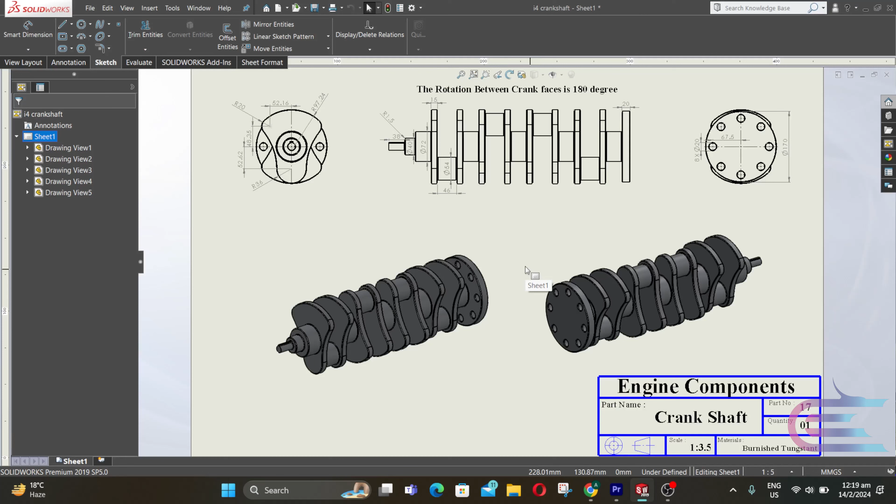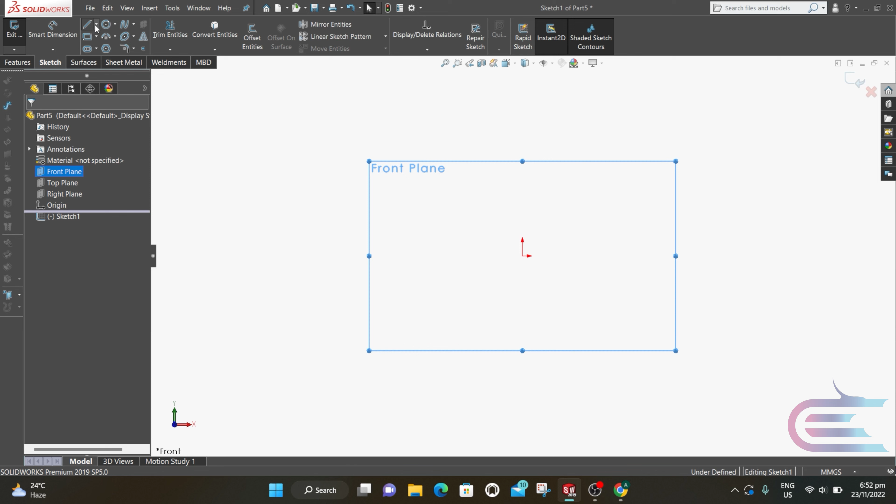In today's tutorial, we are going to design an I4 crankshaft. So let's start. From File, select New, then Part, then click OK. Right click over the front plane and select Normal. Right click again and select center line and draw a center line vertically.

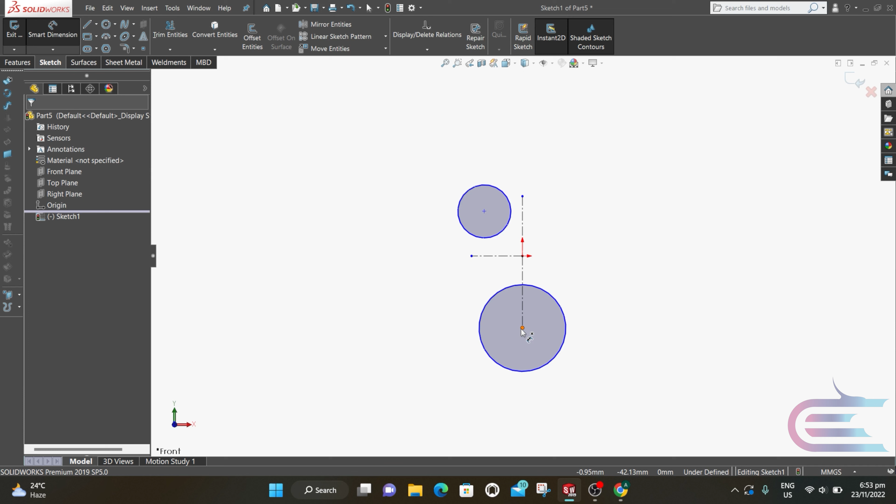Draw a horizontal line from the origin point. Select Circle and draw a circle at the bottom point. Draw another circle at the mid of these points. Select Smart Dimension, and this distance from the origin is 44 millimeter, and the diameter is 72 millimeter.

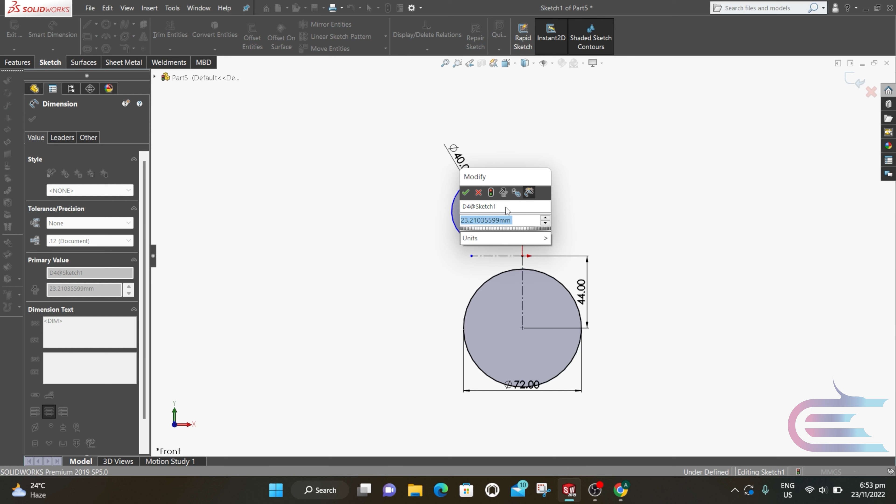This diameter is 40 millimeter, and the distance from the vertical line is 52.155 millimeter. Horizontal distance from center is 56.967 millimeter.

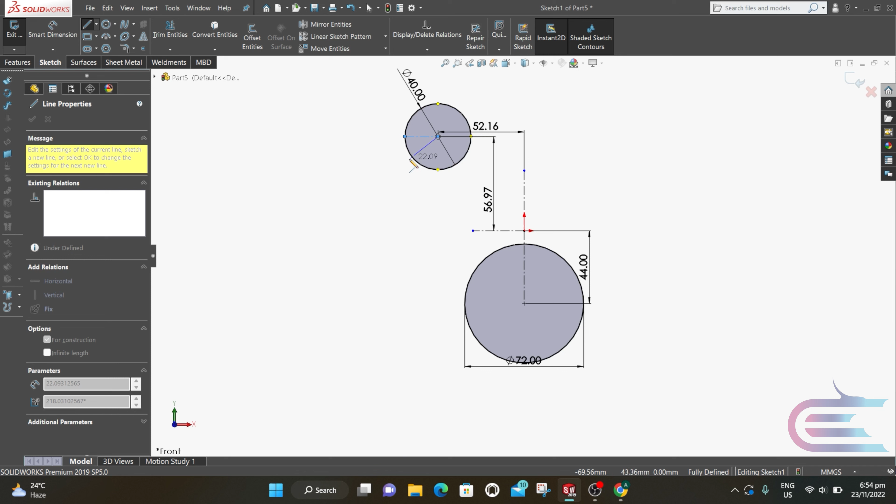Select center line and connect the outer edge of the circle to the center and draw an inclined line to the first one. Now select Smart Dimension. The angle between these two lines is 37.3 degrees.

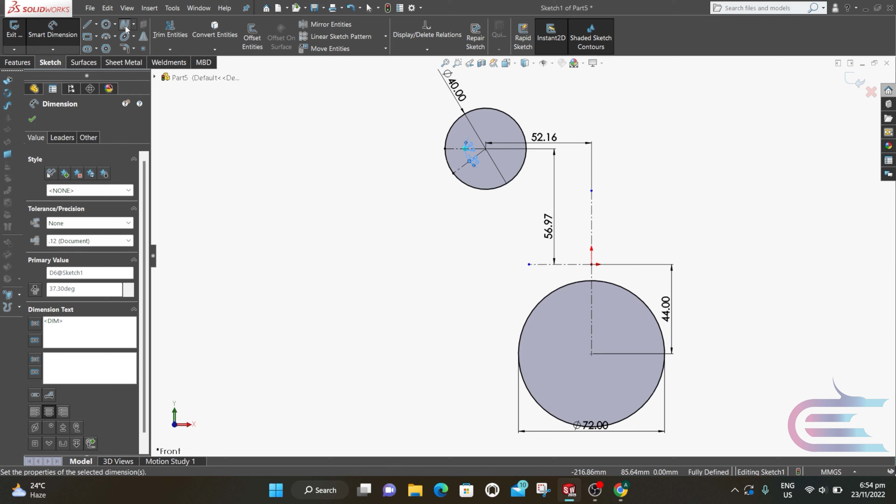Now select Spline, and from the horizontal outer edge to the circle and one point to the middle, and then another point to the outer edge of the inclined line. The distance from the midpoint of the spline to the horizontal line is 2.714 millimeter. And this point to the vertical line distance is 42.564 millimeter.

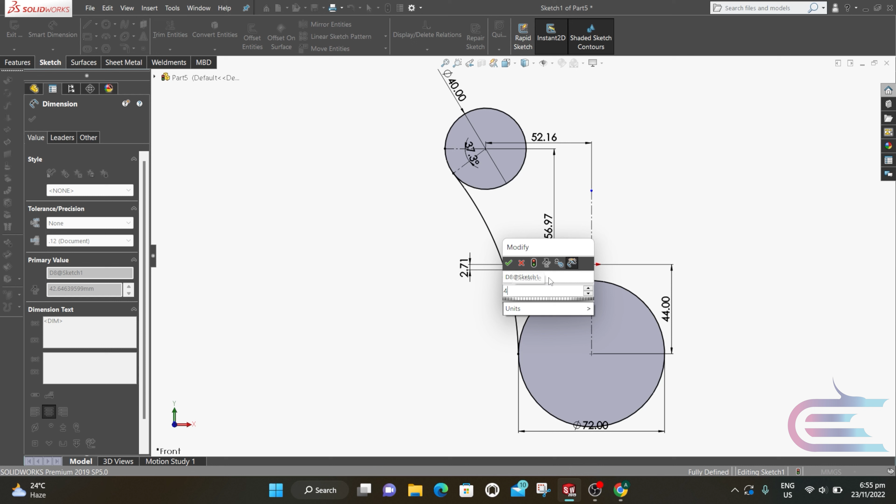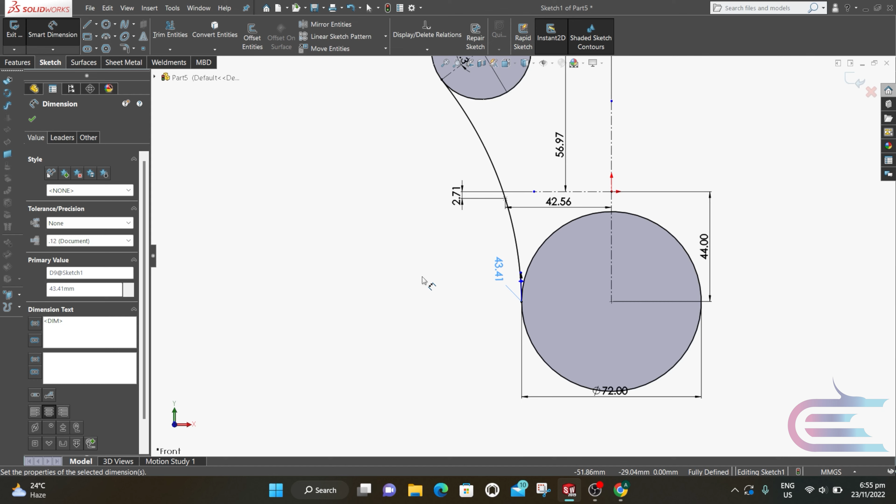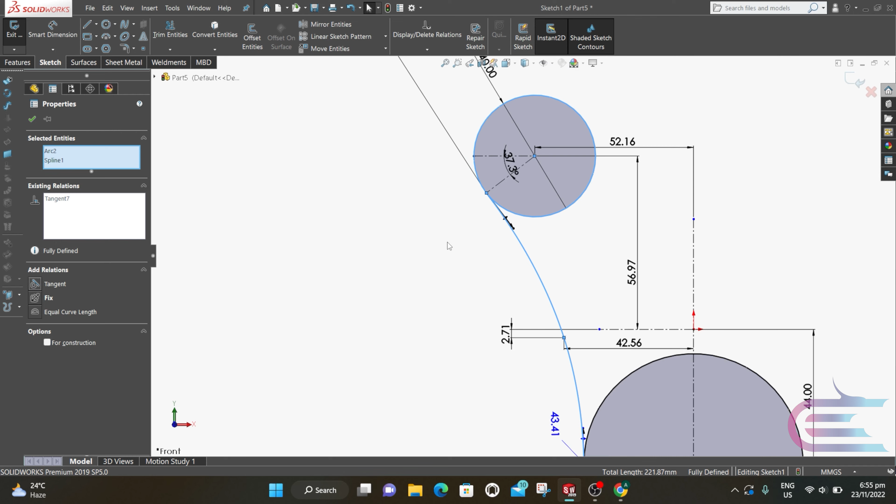Now click on the point handle, and the distance parameter is 43.41 millimeter. Similarly, click on the point handle of this side of spline, and distance parameter is 55.3 millimeter. Now control and select the spline and the circle and click on tangent. Then press enter.

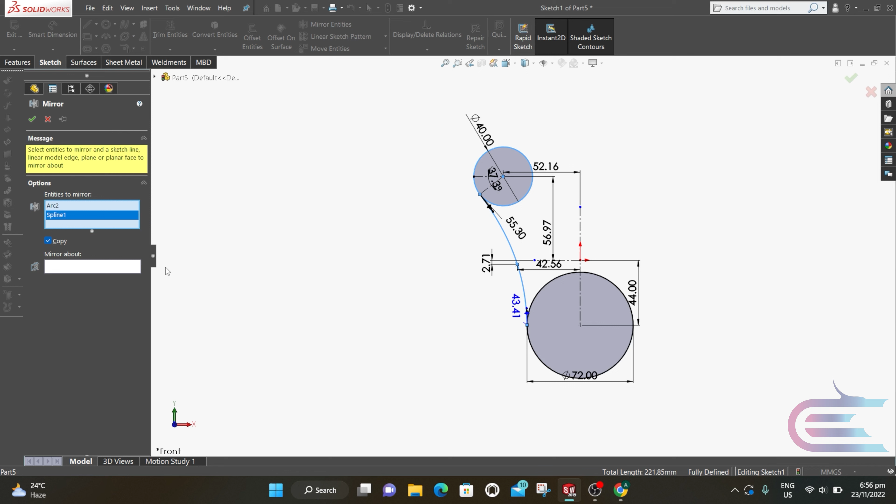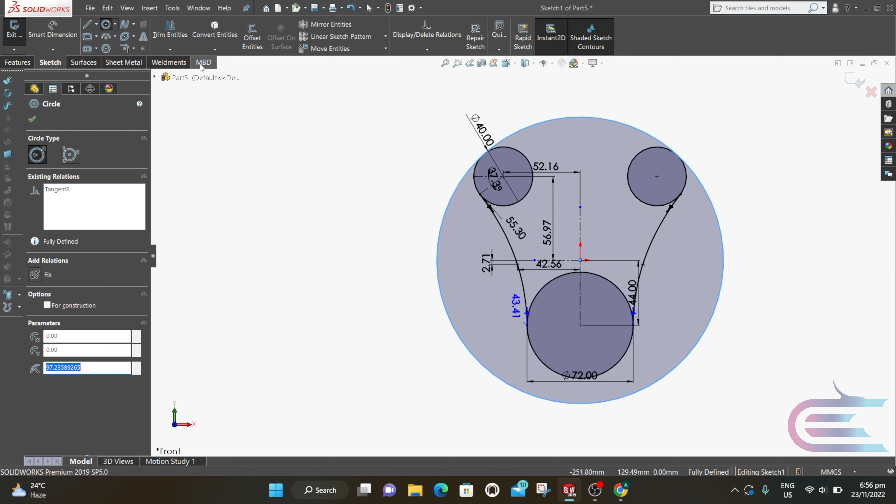Click on mirror and select the circle and the spline. Then mirror about the center line. Then click OK. Now click on circle and draw a circle till the outer edge of the upper circle. Now select trim and trim the extra portions. Then click OK.

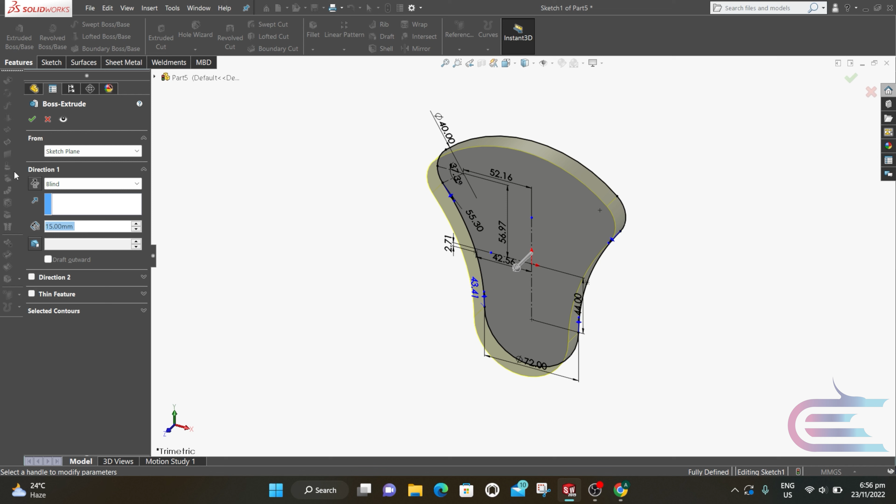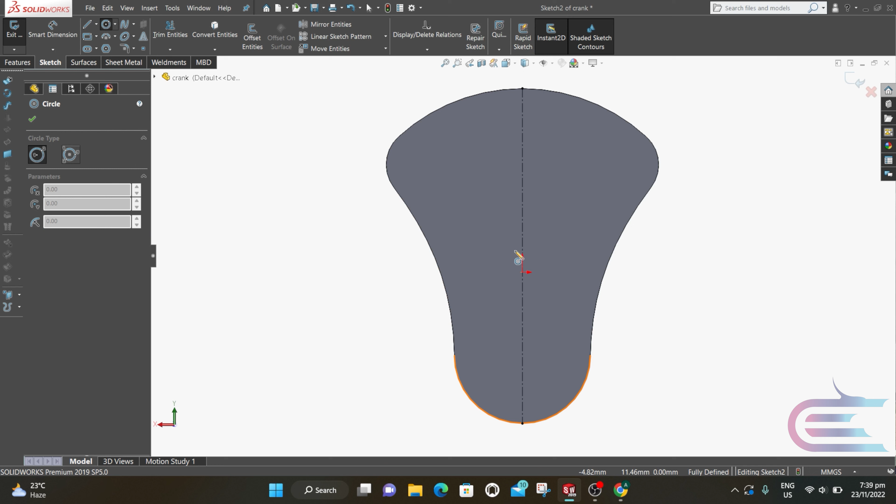From features, select extrude. Extrude 15 millimeter. Then click OK. Go to the opposite side. Right click over this plane and select sketch. Select normal to. Select center line and draw a center line from upper point to the bottom point. Then press escape. Select circle and draw a circle at the midpoint of the center line.

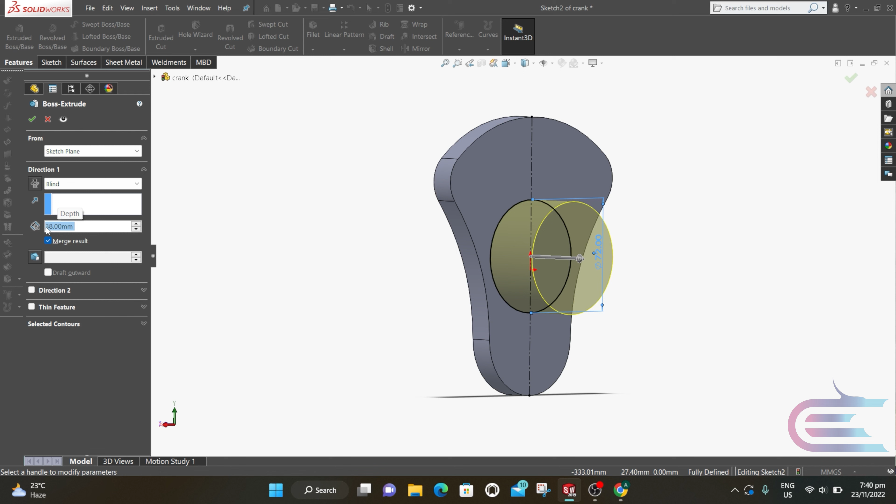The diameter of the circle is 72 millimeter. From features, select extrude and extrude 38 millimeter and click on merge result. Then click OK. Now go to the opposite side. Right click over this surface and select sketch. Select normal to.

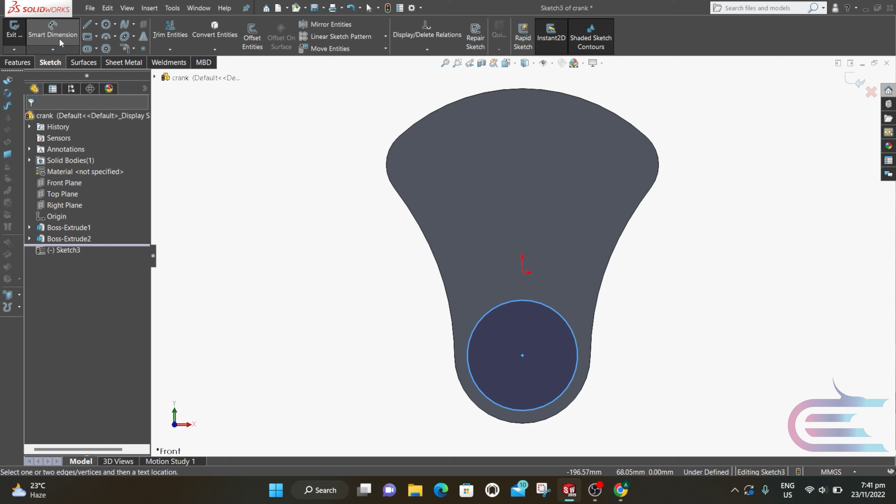Select circle and put the cursor over the outer edge. Then the center will be shown, and from center draw a circle. The diameter is 54 millimeter. Select extrude and extrude 46 millimeter. Click on merge result and click OK.

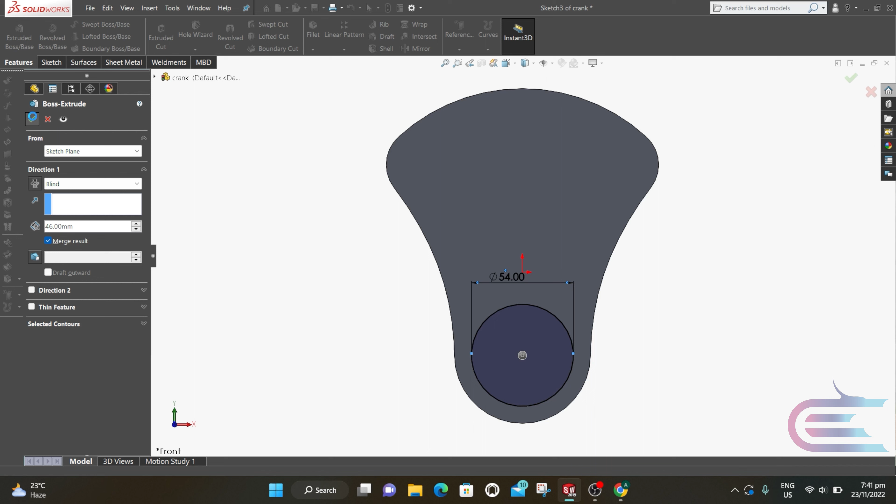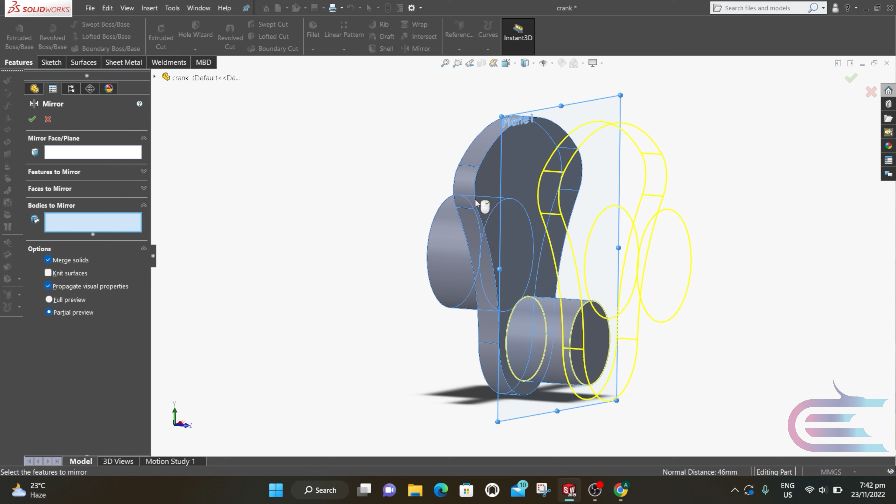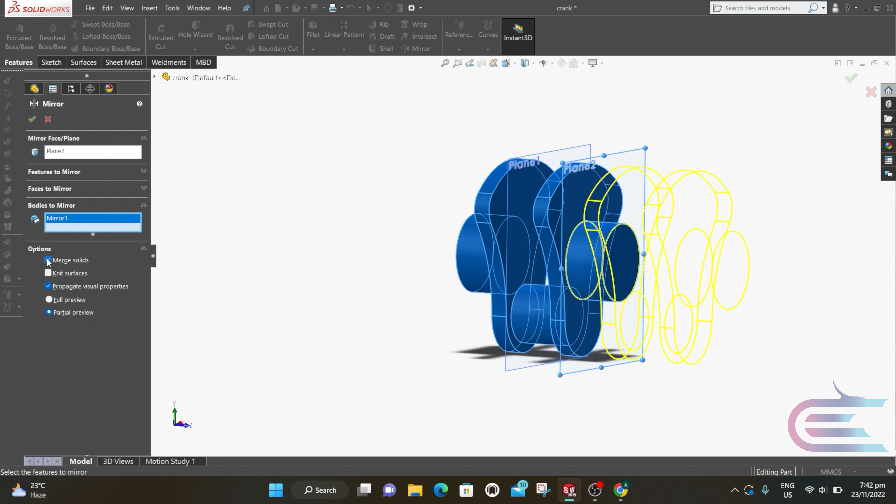From reference, select plane and click over this surface and this surface. So a new plane will be created at the middle of this, and then click OK. Select mirror and mirror about this plane. Select the body, then click OK. From reference, select plane again and select this surface and this surface. So a new plane will be created. Then click OK. Select mirror and the plane is selected. Select this body, then click OK.

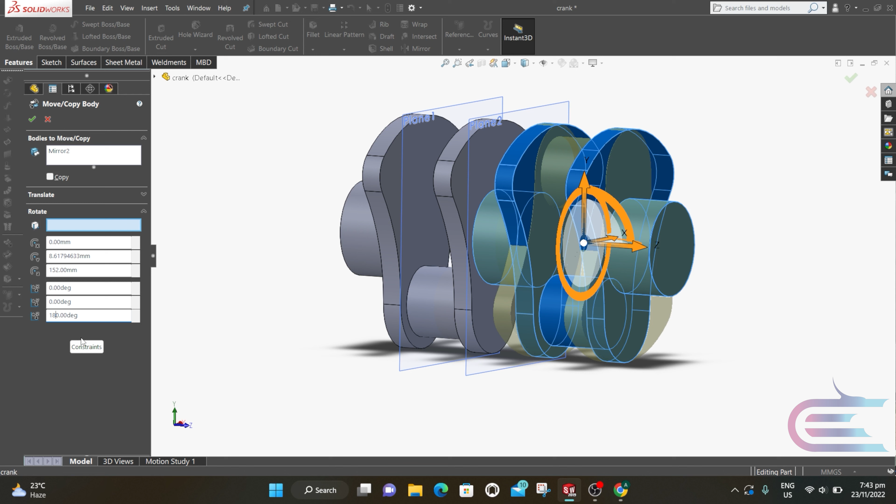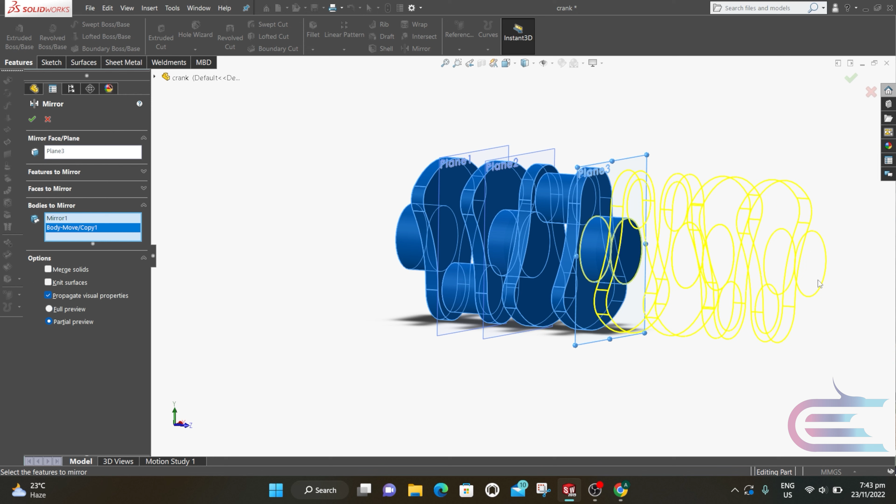From insert, select features and then go to move copy. Click on this body and go to angle and select 180 degrees. Then click OK. Now from reference, select plane and select this surface and this surface. So a new plane will be created at the middle of this. Then click OK. Then select mirror. Select this body and this body. Then click OK. Press Ctrl and select all of 3 planes. Then right click over the plane and select hide.

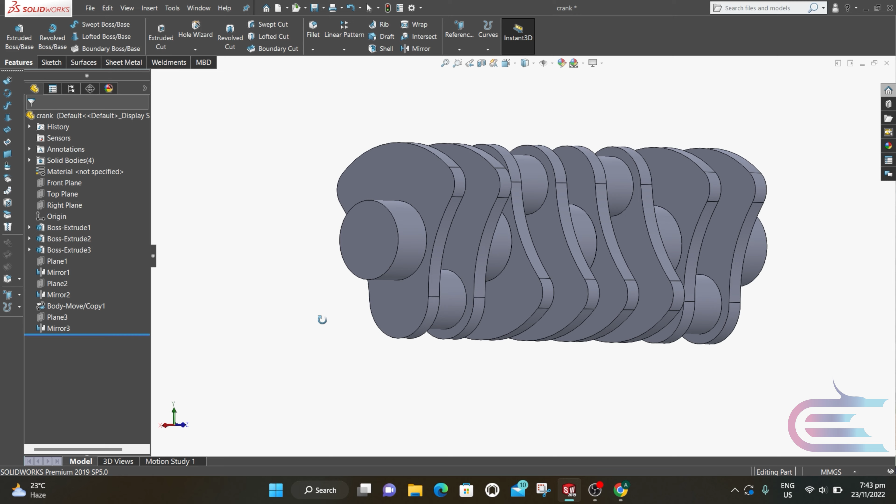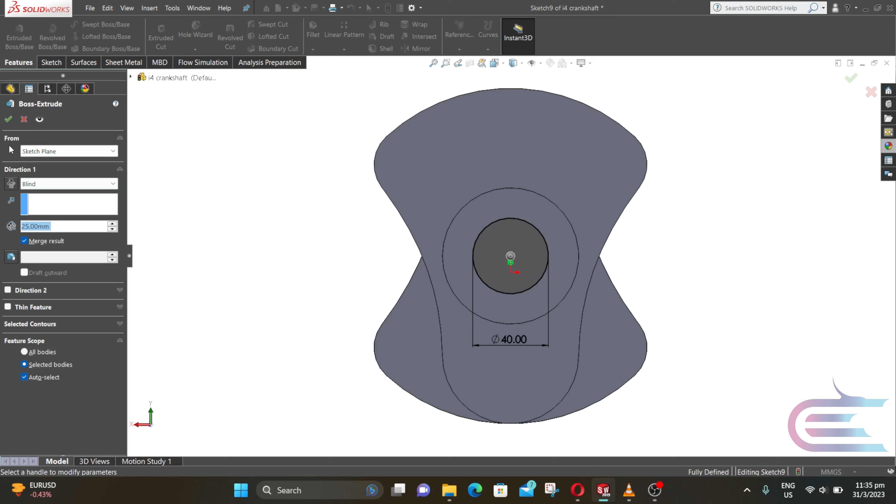Now rotate the body. Right click over this surface and select sketch. Select normal to. Select circle and put the cursor over the outer edge. Then the center will be shown. From center, draw a circle. The diameter of the circle is 40 millimeter. Then click OK. From features, select extrude and extrude 25 millimeter. Then click OK.

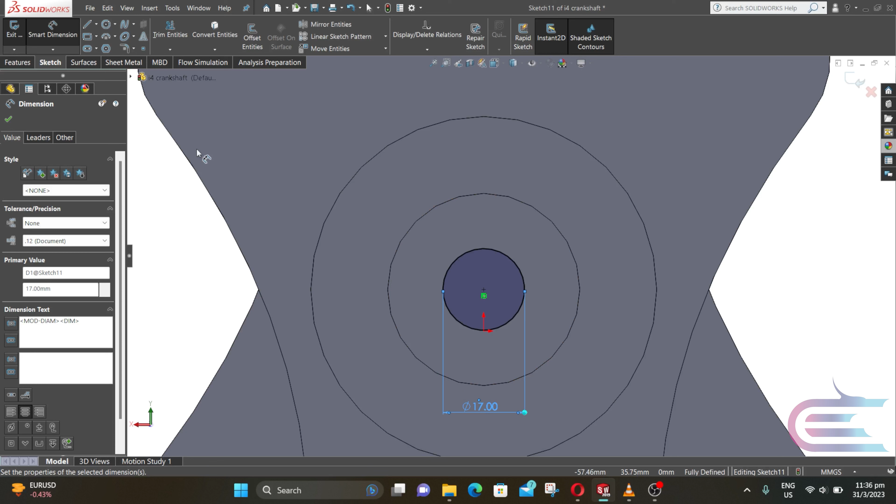Again, right click over this surface and select normal to. Right click again and select sketch. Select circle. Similarly, from center, draw a circle. Diameter is 17 millimeter. Select line and draw a center line vertically. Now select line. Draw a vertical line offset of the center line. Then horizontally connect the center line.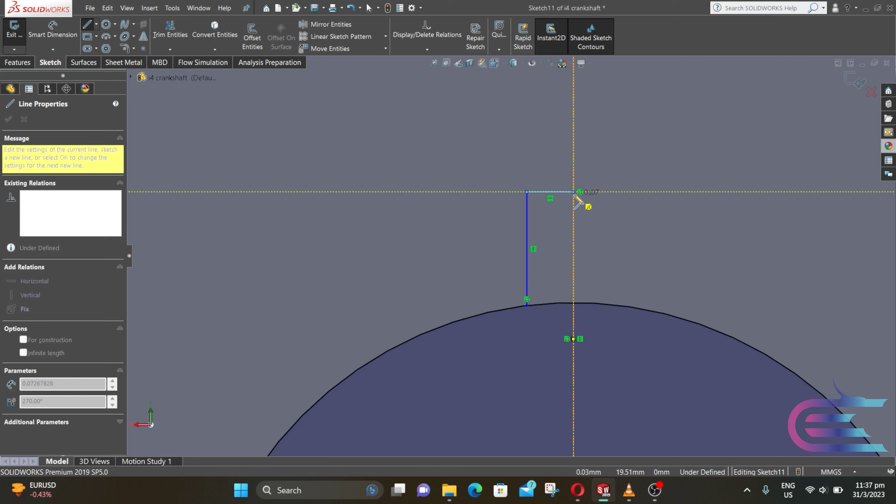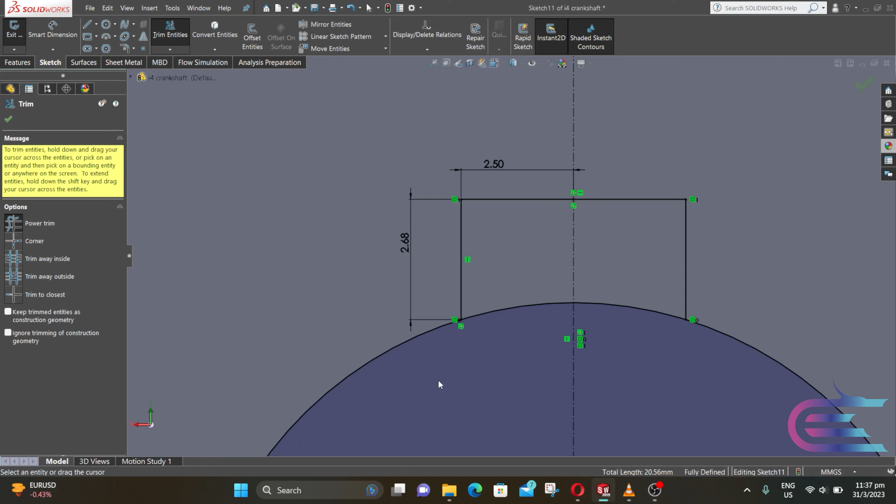Select smart dimension. And this length is 2.5 millimeter. And this length is 2.675962 millimeter. Then click OK. Select mirror and mirror these 2 lines about the center line. Then click OK. Select trim and trim out the extra portions. Go to features and select extrude. Extrude 38 mm and click on merge result. Then click OK.

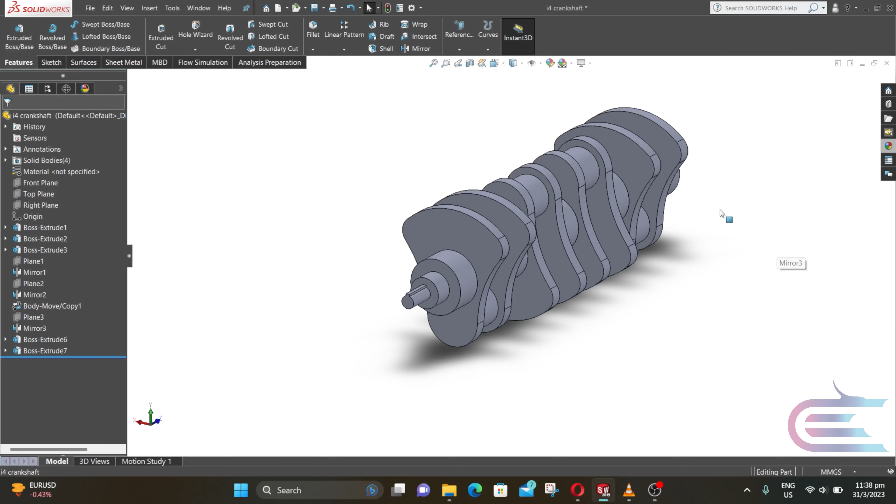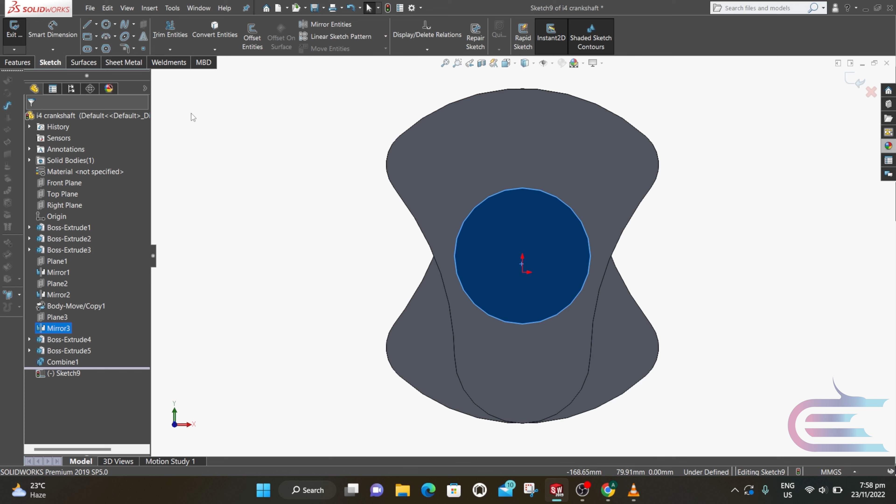Now rotate the body. From features, select combine. Select the whole body. Click on add. Then click OK. Right click over this surface and select normal to. Right click again and select sketch. From circle, draw a circle at the center point. Draw another circle and select for construction. Now draw a smaller circle over the construction circle.

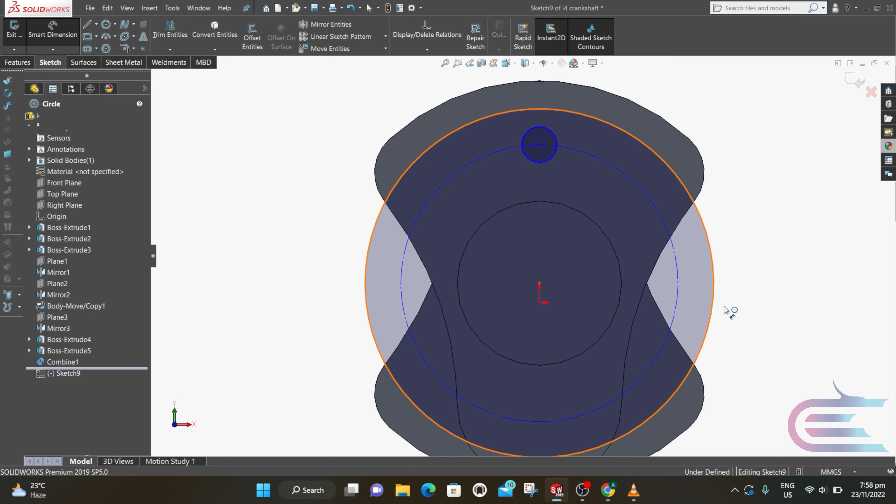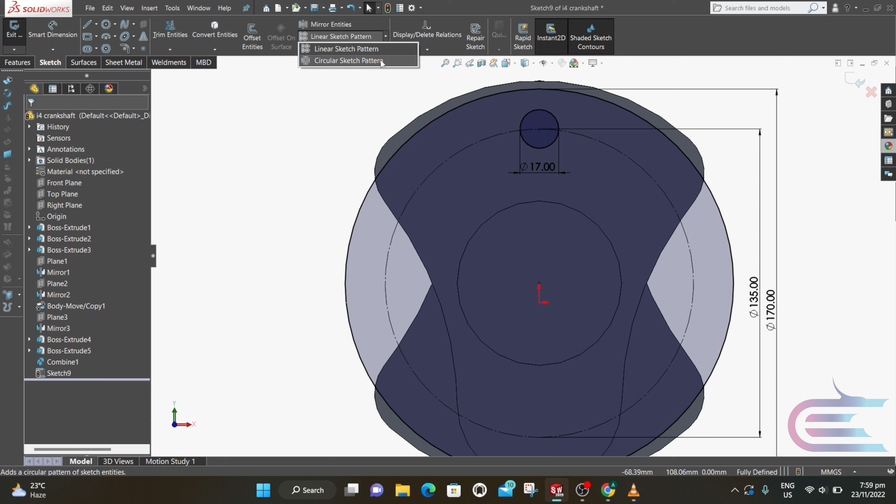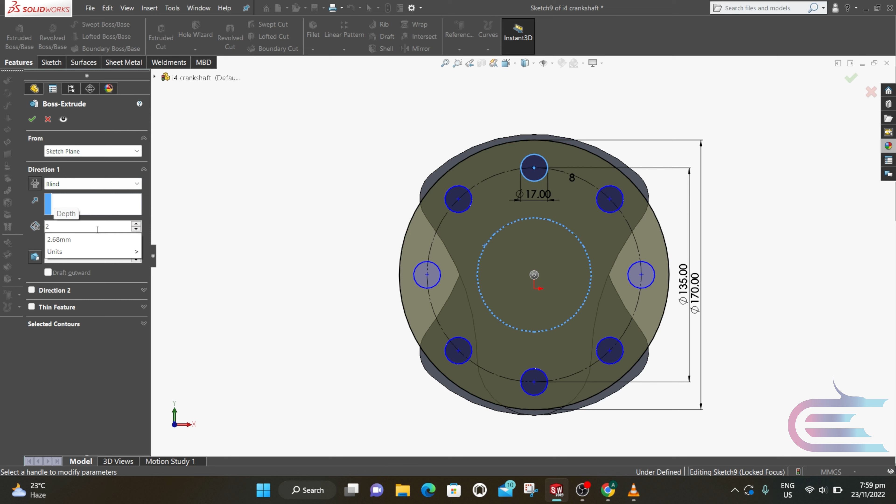The diameter of the outer circle is 170 mm. The construction circle is 135 mm. And the diameter of the smaller circle is 17 mm. Now go to circular sketch pattern. Entities to pattern is the smaller circle and the number of entities is 8. And select the circular edge as the center. Then click OK. From features, select extrude. Extrude 20 mm. Then click OK.

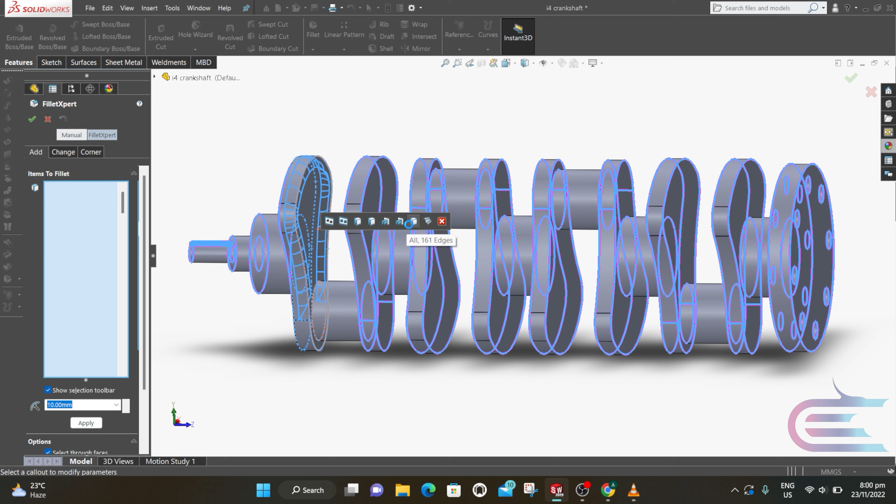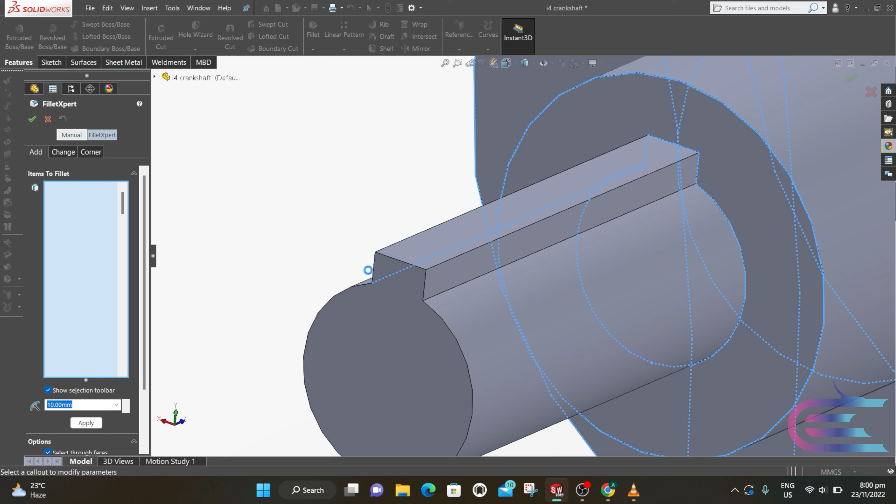Click on fillet and select this edge, and the FilletXpert window will pop up, and select all of the edges. Press Ctrl and click on these edges to deselect. And the radius is 1.3 mm. Click on apply.

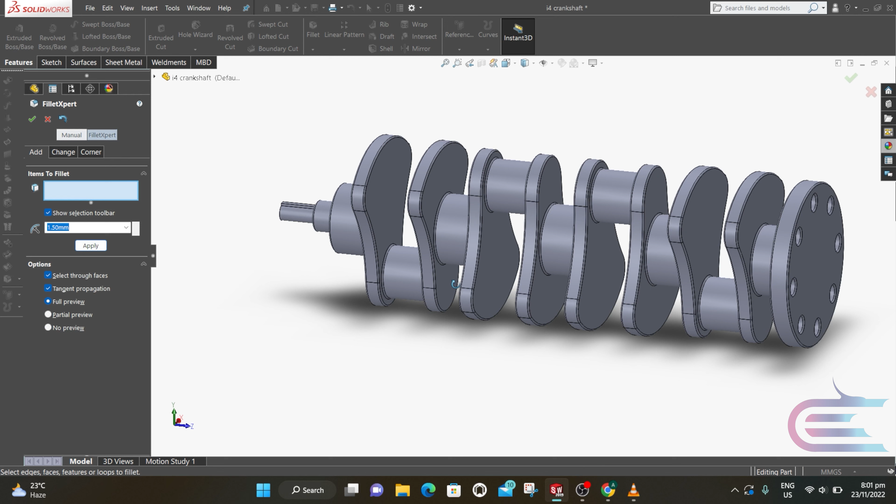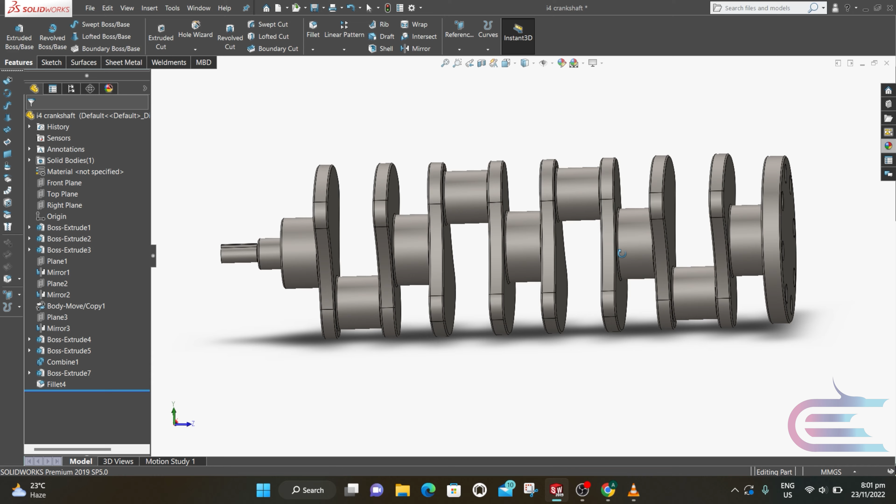Then press enter. Go to appearance and select steel. Then click on matte steel. From file, select save. Save as I4 crankshaft.